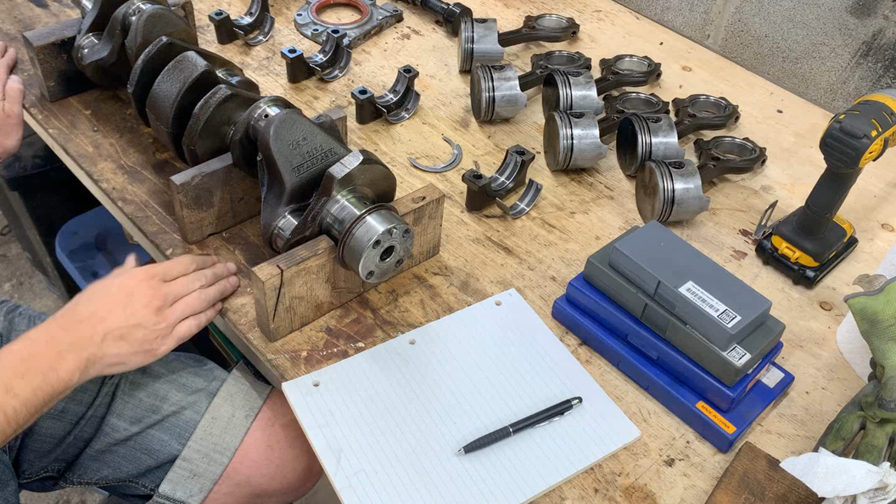Alright, so it's another day and I've been waiting all day for this moment because I'm really curious to find out what the measurements are of this crankshaft. According to the bearings, it's 20 over, so it's been ground already once or twice, I don't know. But I want to find out if it's still good for 20 over bearings. So let's find that out.

I haven't looked at the manual. I didn't want to know what the spec is, so I can have a little bit more accurate measurements, you know what I mean? I'm gonna measure in multiple directions and multiple positions, left to right in the bearing area, to make sure that they are not oval or tapered.

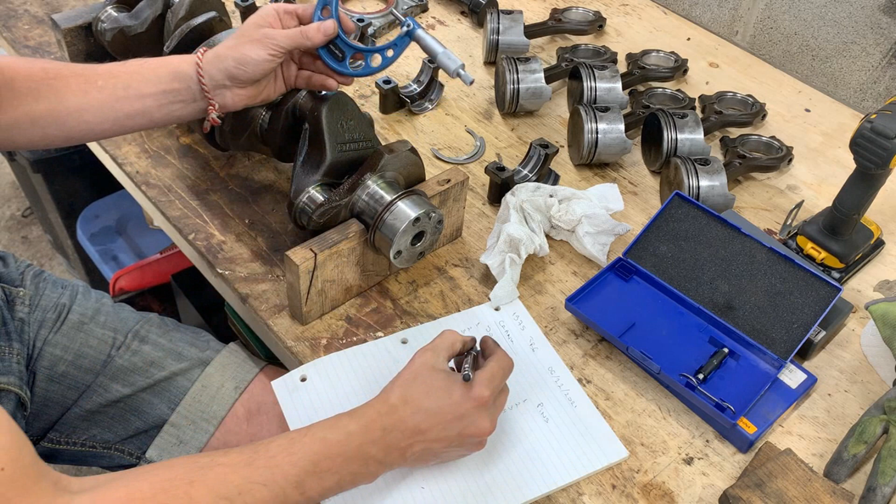Pretty consistent. So that's a good sign. Everything is within 6/10,000 on the journals.

Let's check the pins now. On number 6 we have 1.8, and then we have 56.3.

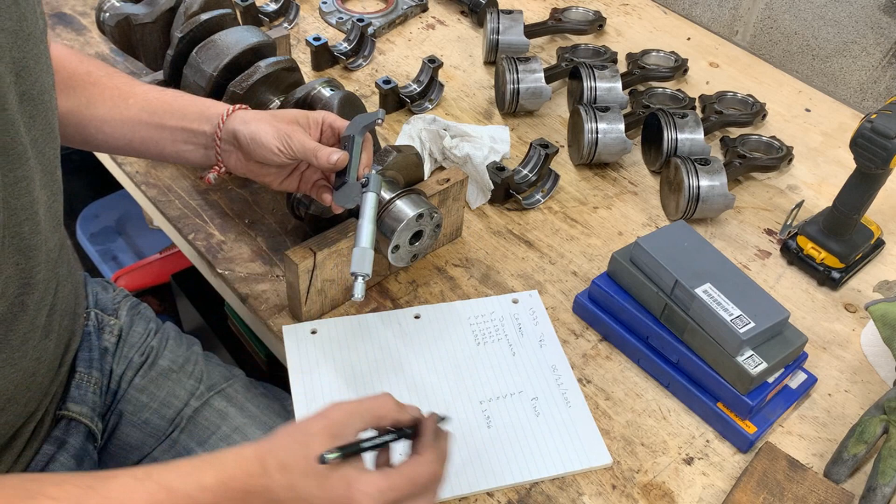So the journals are within 6/10,000, but here on the pins I went and remeasured. I was hoping that I measured this one wrong, but it's 63, and this one is 53. And we even have 51. We have 12/10,000 of a difference between the smallest one and the biggest one. That's our range here, and here our range is

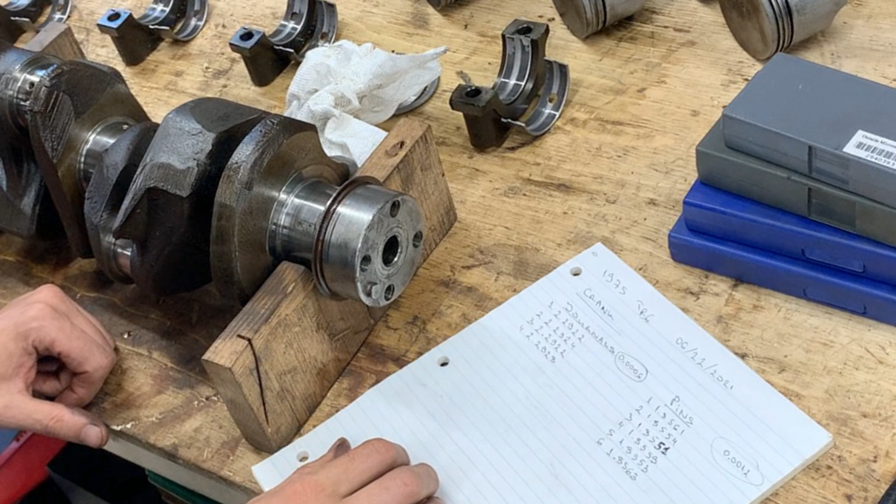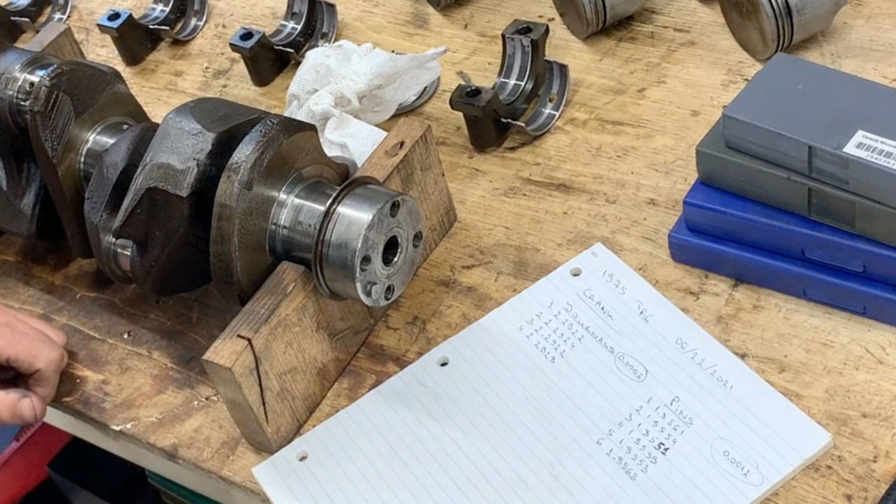6/10,000. So anyways, we're gonna check in the manual and see what the spec is for the journals and the pins, and we'll see how close we are. Because if we're somewhere in the middle here, we're gonna have some that are 6 less and some are 6 over, so we'll be fine. But if they need to be 51 all of them, for example, this one is gonna be too big for us.

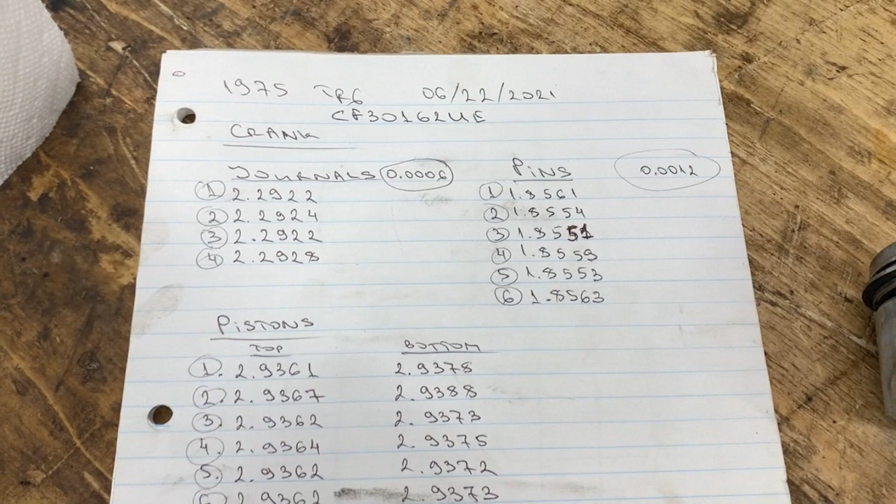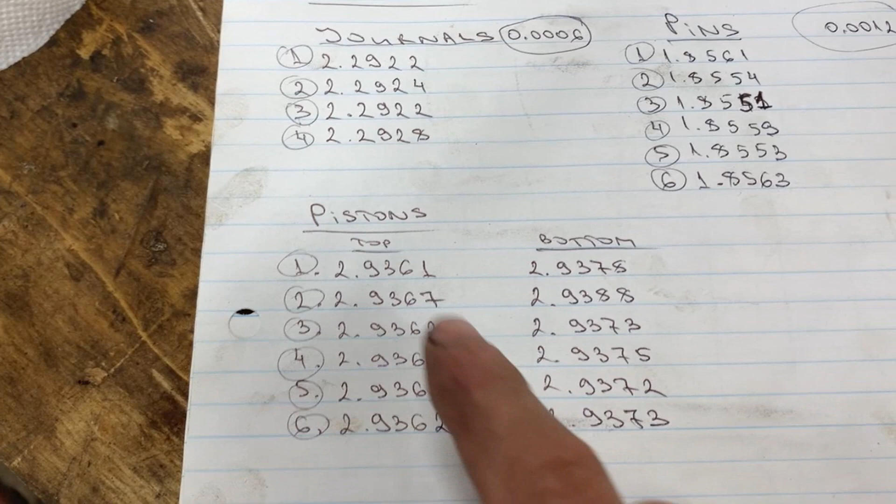Alright, so these are all the numbers, the journals, the pins on the crankshaft, and the pistons. Now for the pistons, I measured top and bottom. The important number is the top one. I just wanted to measure the bottom as well and see how even the pistons are worn, but we're just fine. So 61 to 78, 67 to 88. Everywhere we are almost 1.5 to 2 thou bigger at the bottom than at the top.

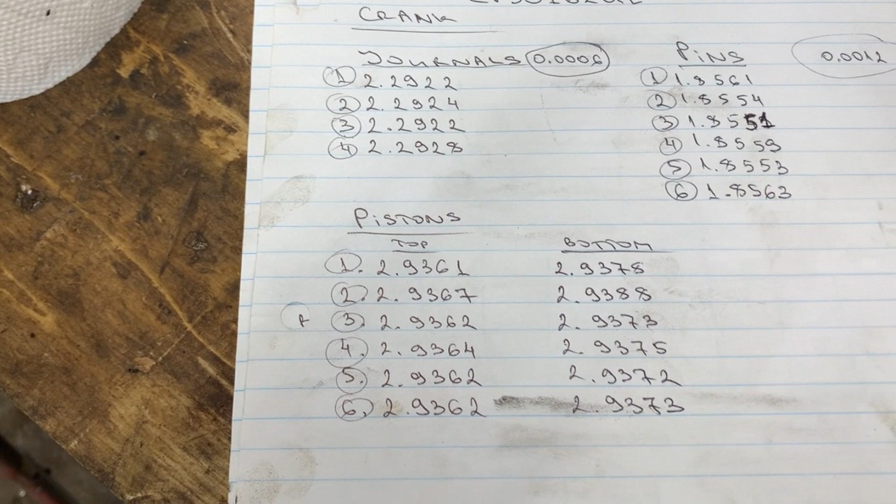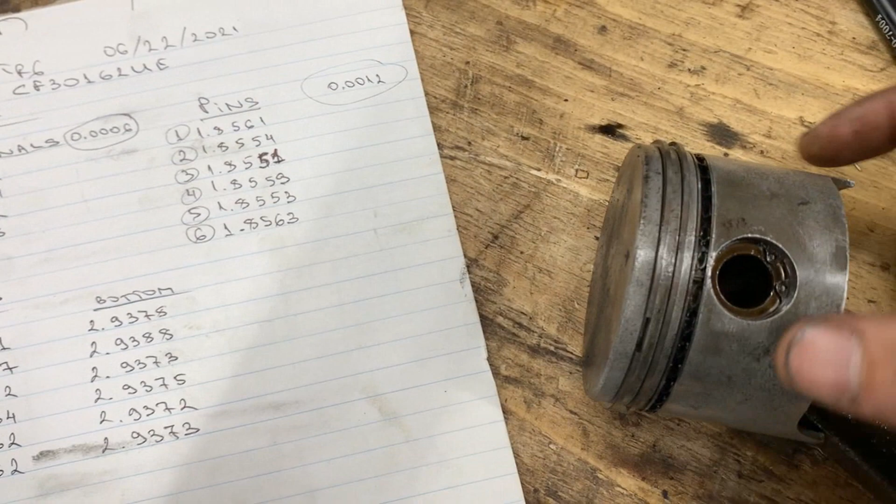That's normal. Pistons are tapered and oval, so when we measure, we always measure in this orientation across the pin, not parallel to the pin, of course. In this direction they are smaller, they're oval. If you look at it closely, they're oval, especially if you look that way. So anyways, I need to know this so we can compare to our cylinders and see what our clearance is between pistons and cylinder bore.

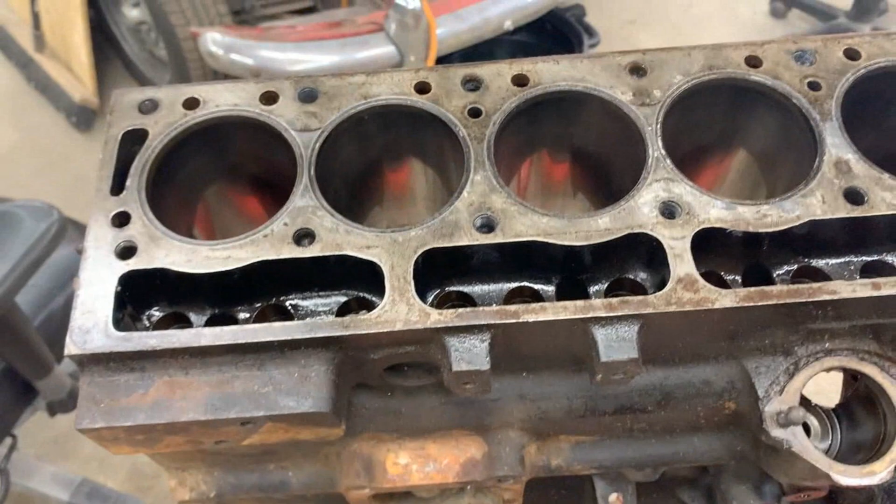And now I have the block here and we're gonna start measuring the cylinders. I purposely didn't take the spec yet, I don't want to know what the spec is. Unfortunately, I've recently measured another block, and for those of you who follow my channel, you know I'm rebuilding another engine at the same time as the 74 TR6 at work. And since I've done it just 2 days ago, I still remember the exact spec for here, and that's 2.94.

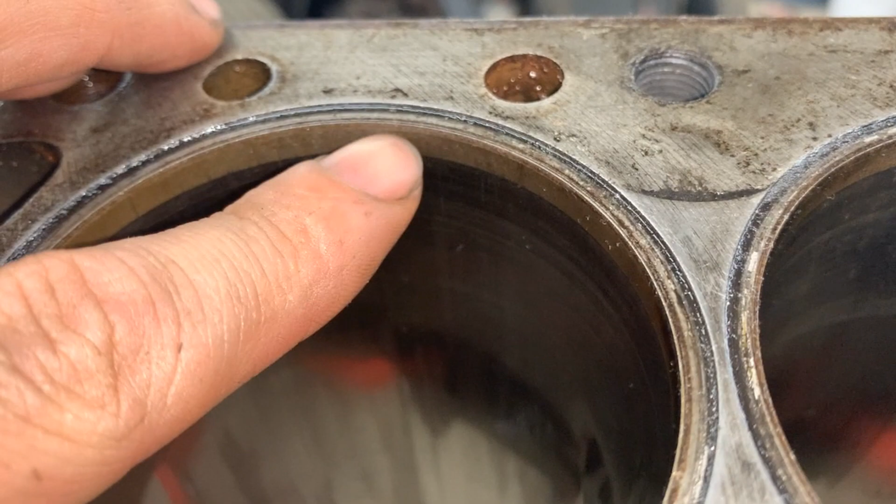Let's see how much difference we have. But before that, let's look at the cylinders closely now that we don't have pistons in them. Okay, so here is our whatever -- like I said, this is not a ridge. First thing when you open a cylinder block is to look at this and see if there's a ridge here where the rings stop. Normally when the rings wear the cylinder out, they create a ridge here. That tells you right away that this cylinder is already overworn. But here we don't have a ridge, it's just discoloration.

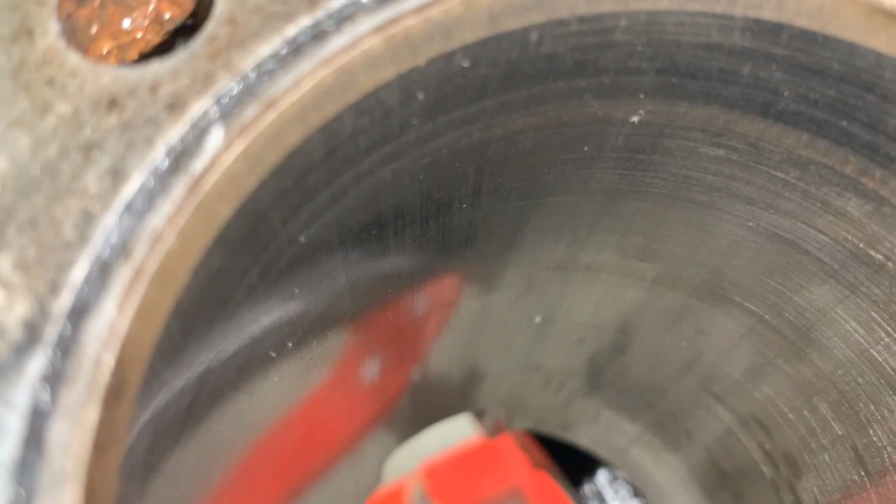So I don't see any heavy scratches or anything. Unfortunately, there's no cross hatching. If there was cross hatch still, I would say this has been done very recently. Anyways, we'll see what the size is, and if they're close to the spec, we're gonna just hone them and buy standard size rings and assemble them as they are. I really hope that this is the case.

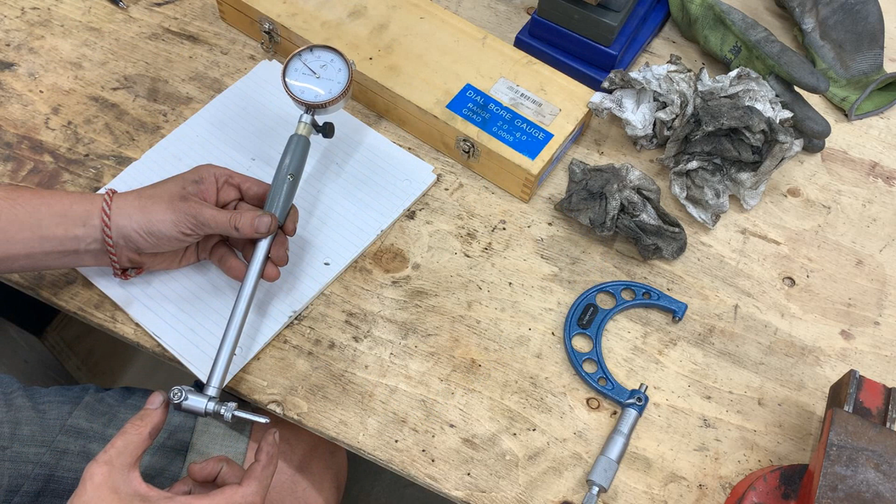And of course, this known measurement is going to be whatever we have as a spec for the cylinder, which is 2.9400 inches. And then anything bigger than that is going to show something like that. So with this, we're not measuring the whole distance, we're measuring the difference between our set number and what in actuality the cylinder bore is. Let me show you how we're going to set it to 2.9400. We're going to set our micrometer to this measurement, so that's 2.9.

So that's 2.9, 25, 30, 35, 40. So that's exactly 2.9400, this measurement from here to here.

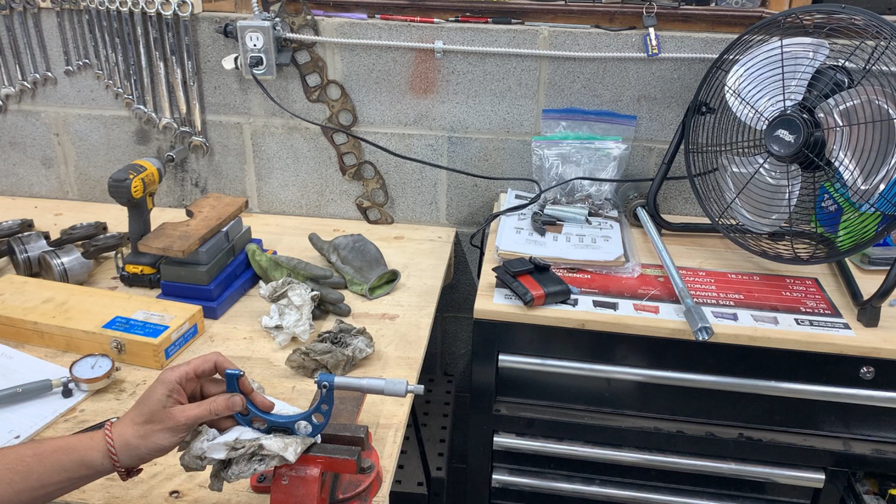So now we have to set our dial gauge to show 0 when it's here. And we're almost there, by the way. I'm going to put the micrometer on the vise very gently, because it's a precision measuring tool, so we don't want to screw it up, right? So we have to put it right in between those two.

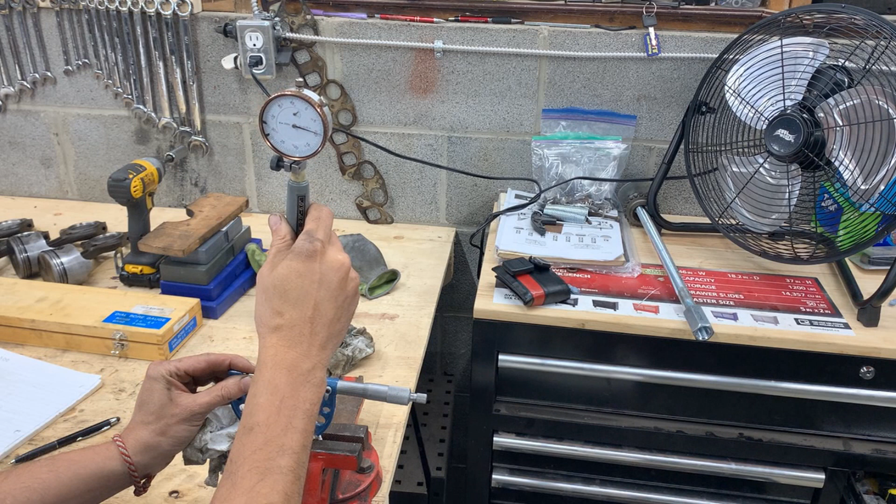So now we have to find the narrowest distance here, because everything wider than the narrowest spot is diagonal. We don't want diagonals, we want perpendicular. So that's where our 0 is.

Thing is, I'm not going to be able to do it like that. So there you go, it goes to 0. As I'm shaking it up and down, it goes to 0, and then it goes up again. So 0 is our shortest distance. So that's it. Now we know that when it shows 0, it shows exactly

2.9400. And then whatever the distance here is, that's our difference. That's how much over 2.9400 we have. So let's go to the cylinder now.

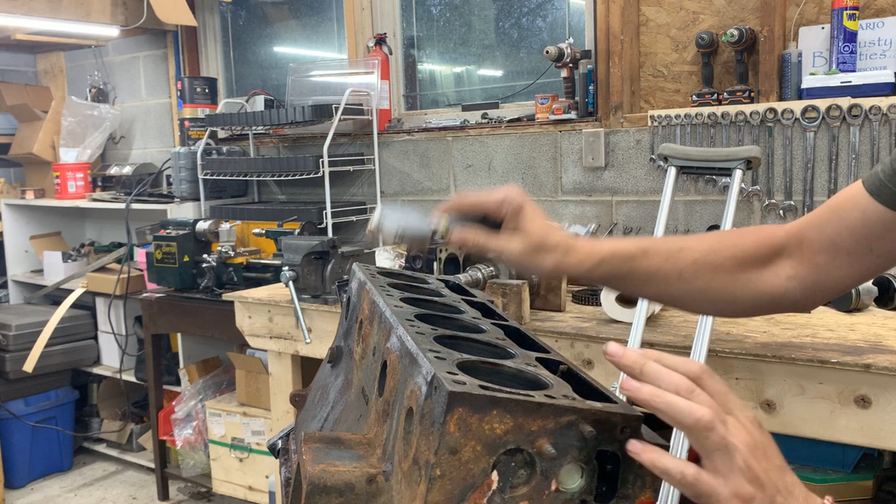Alright, so now that we have our tool set to 2.94, let's see how wide our cylinder is. So how we measure is we drop it down and we try to position it perpendicular to the cylinder, because if it is tilted like that, it's going to give us a wider measurement, or if it's tilted like that, again, it's going to give us a wider measurement. We're looking for the shortest measurement, which is going to be exactly perpendicular.

So when we drop it down, you see, wide, narrow, and then going wide again. So we're looking for the shortest one, the narrowest one, which for us here is 21 10,000ths, I would say.

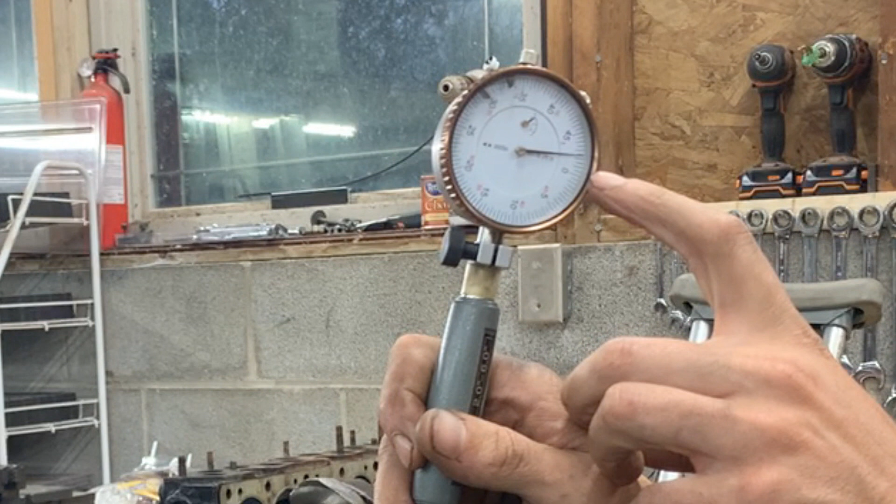So the small increments here are 5 10,000ths of an inch or half a thou, and every other one is 1 thou. So we have 2 thou and a little bit more. So 21 10,000ths of an inch is this cylinder.

This tells us that the difference between our set measurement and the true measurement of the cylinder is 21 10,000ths. So these 21 10,000ths we need to add to our set measurement, which is 2.9400. So now we know that this cylinder is exactly 2.9421 bore.

So this is the true bore of this cylinder. But is that enough for us? No, it's not enough, because this cylinder might not be round anymore, it might be oval. So here it might be exact measurement, but here it might be bigger or smaller. We don't know that. So for this reason, we're going to take 3 different positions.

We're going to measure, I call them first, second, and third position. My first position is always across the block this way. That's my first position. Then I go 120 degrees clockwise, and that's my second position. I measure in this direction too. And then I measure 120 degrees counterclockwise from my first position. That's my third position, and we measure also how wide the cylinder is here.

And then when we compare these 3 measurements, we can say if this cylinder is still round or it is out of round, or if it's oval already.

And that's still not enough, because the cylinder might have been worn also in a taper shape like this, because sometimes the cylinders get worn more at the top than at the bottom. So we're going to take one measurement at almost at the top of the cylinder, one somewhere in the middle, and one somewhere at the bottom of the cylinder.

So top, center, and bottom. And again, for each depth, we're going to measure the 3 different positions. And then we're going to compare, for each position, the measurement at top, center, and bottom. And that's going to tell us if in this orientation, this cylinder is tapered.

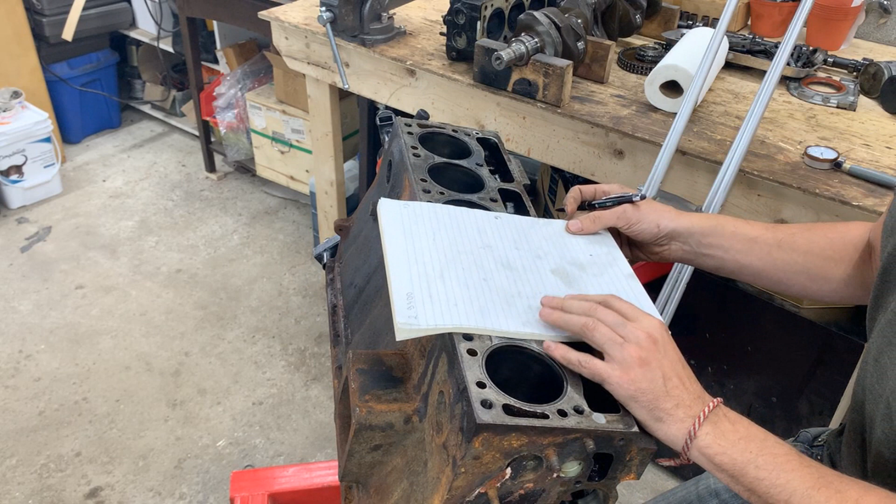For this reason, I came up with a chart like this. I hope you can see it. Maybe I should take a marker. So we said that our set measurement for the dial gauge is 2.9400. This is going to be our top, our center, and our bottom. This is going to be our first position, second, and third position. So let's take these measurements, and then we're going to see how we're going to analyze them.

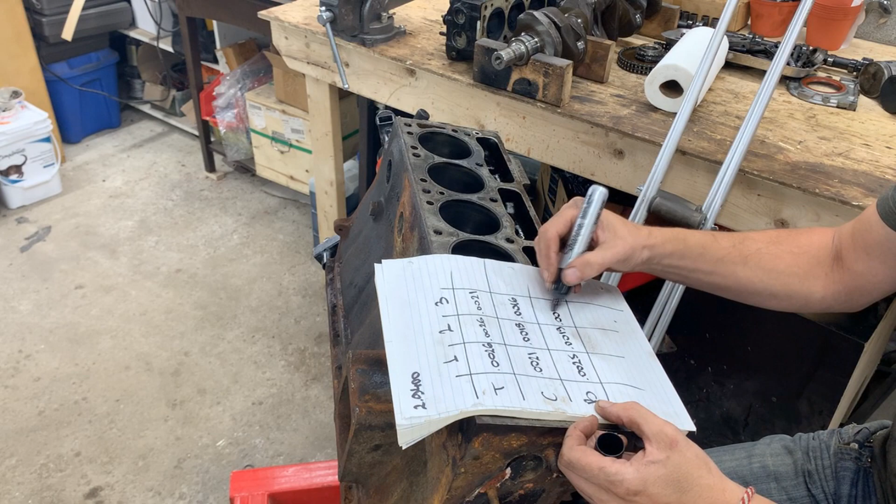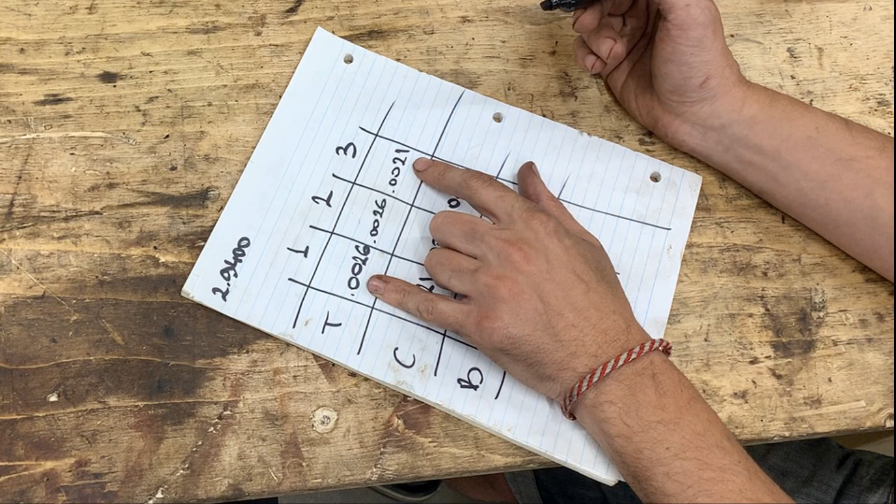Okay, so now that we have all these 9 measurements, let's analyze and see what information that gives you. At the top level of the cylinder, in positions 1, 2, and 3, we have these 3 measurements. The smallest one is 21 10,000ths of an inch, the biggest one is 26. The difference between them is 5 10,000ths of an inch. At the top level, the cylinder bore is out of round by 5 10,000ths of an inch.

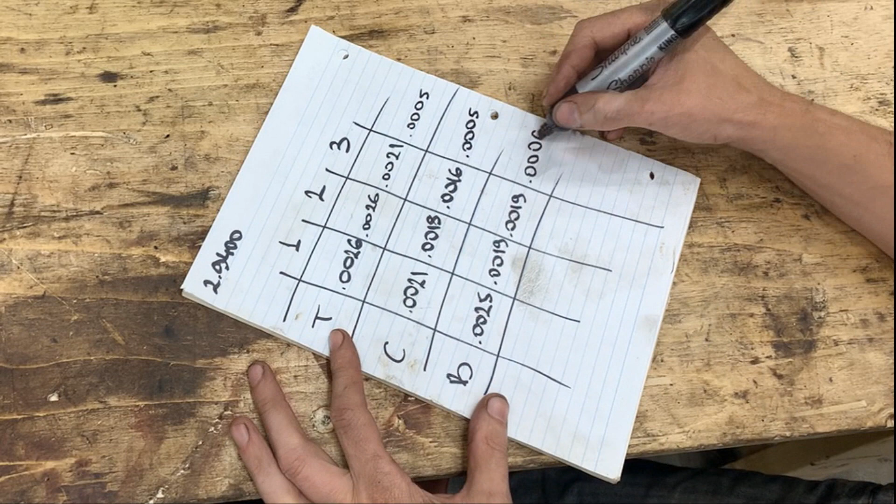Which is totally acceptable, by the way. Here, the smallest one is 16, the biggest one is 21, so at the center we have out of round 5 10,000ths again. And here, 19 to 25 at the bottom, we have 6 10,000ths of an inch out of round. So our biggest out of round is what matters, so .0006 is our overall out of round.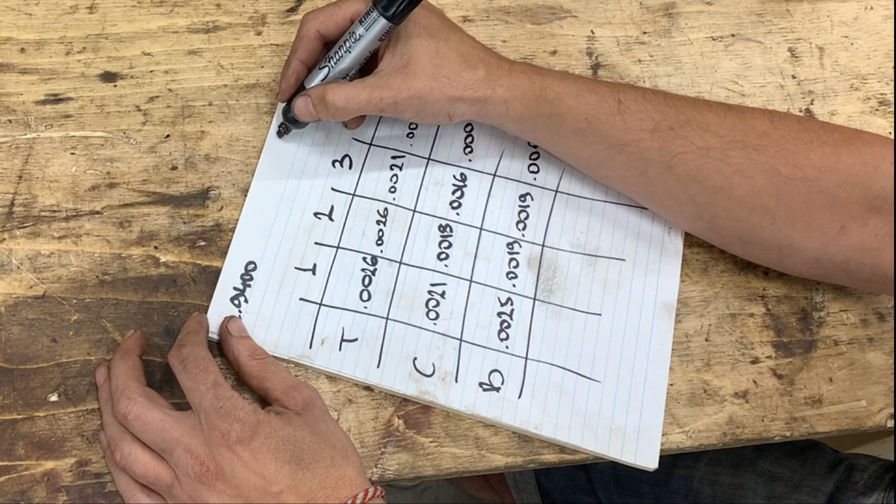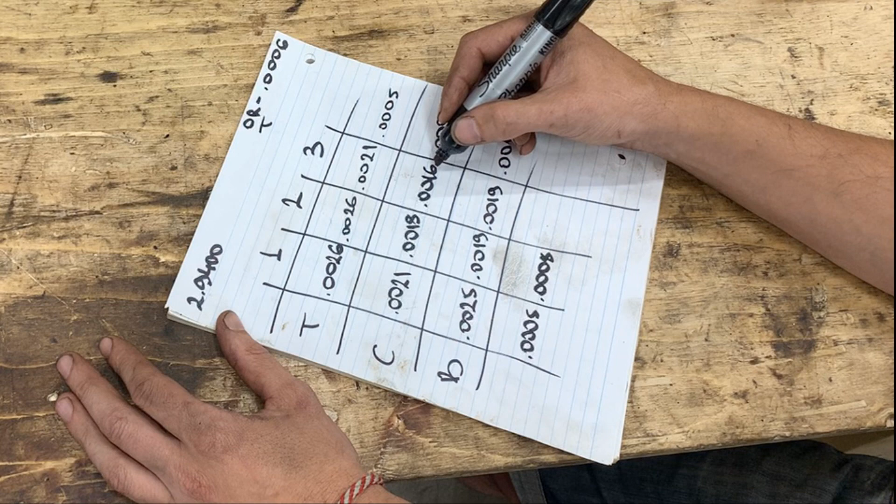Now let's check for taper. We're going to check top, center and bottom of the same position, position number 1. Here we have 21 to 26, that's 5 10,000ths of an inch of taper. Here we have from 18 to 26, that's 8 10,000ths of an inch, and here from 16 to 21, that's 5 10,000ths of an inch. Our biggest taper is 8 10,000ths of an inch, which is totally acceptable too.

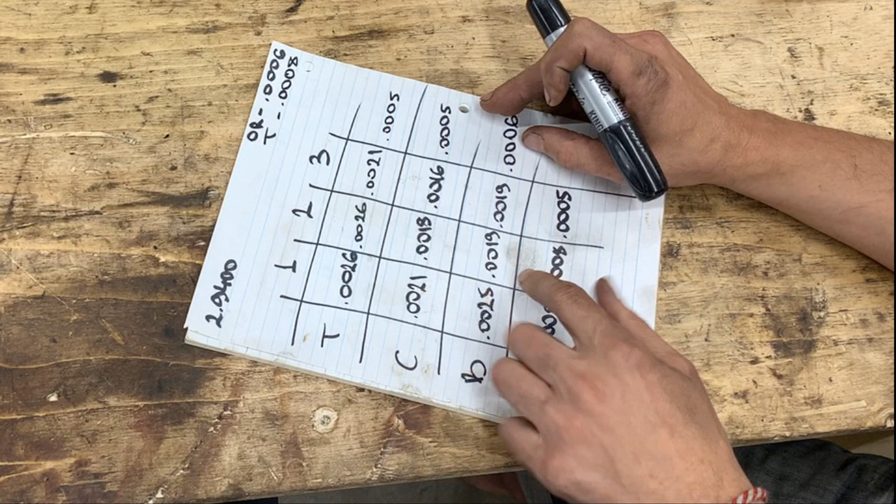And now for our overall measurement, we have to add the biggest number out of these to our set measurement of the gauge. The biggest one is 26 10,000ths of an inch, so our measurement max is 2.9426. So this is the information that we need for this cylinder.

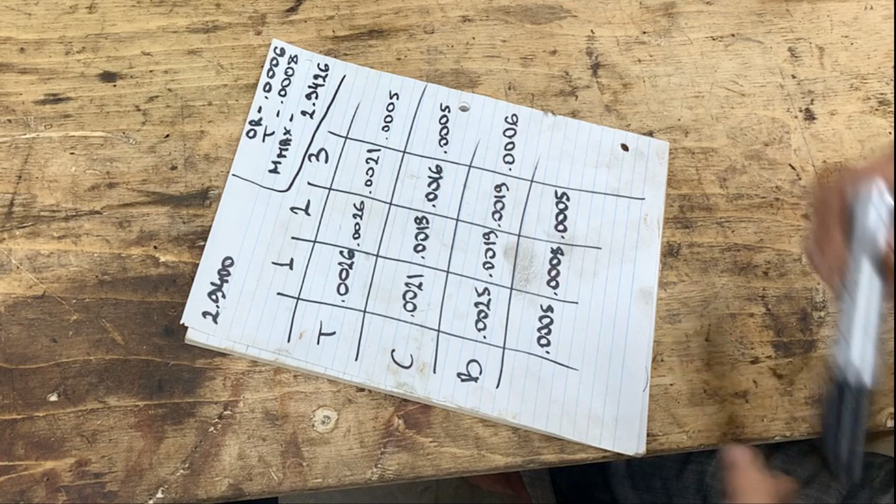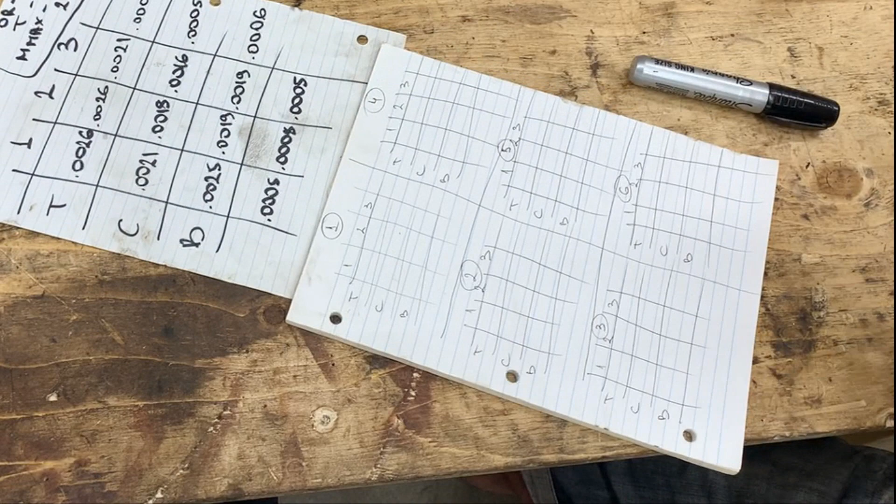So we're going to compare it to the spec and we will see if that's acceptable. But we're going to do that for all the cylinders, and I already drew a chart here that is going to help me put everything together. I'm just going to transfer all this here for the first cylinder, and we're going to measure the other ones too.

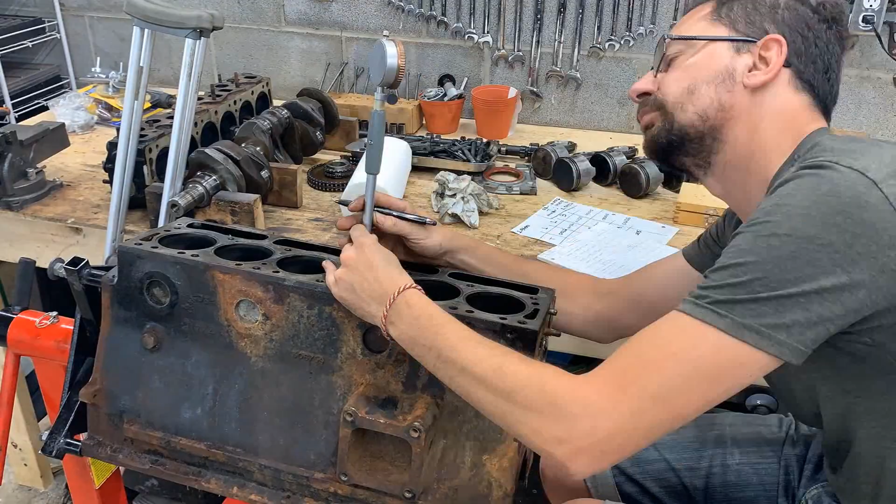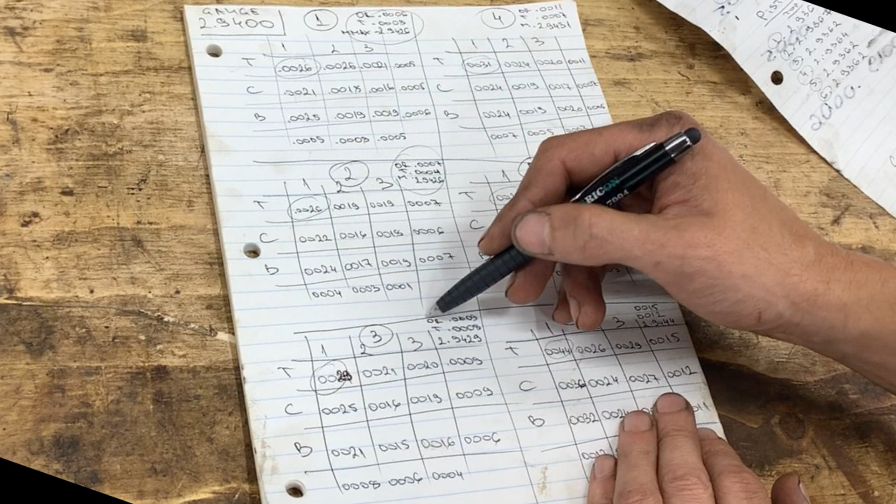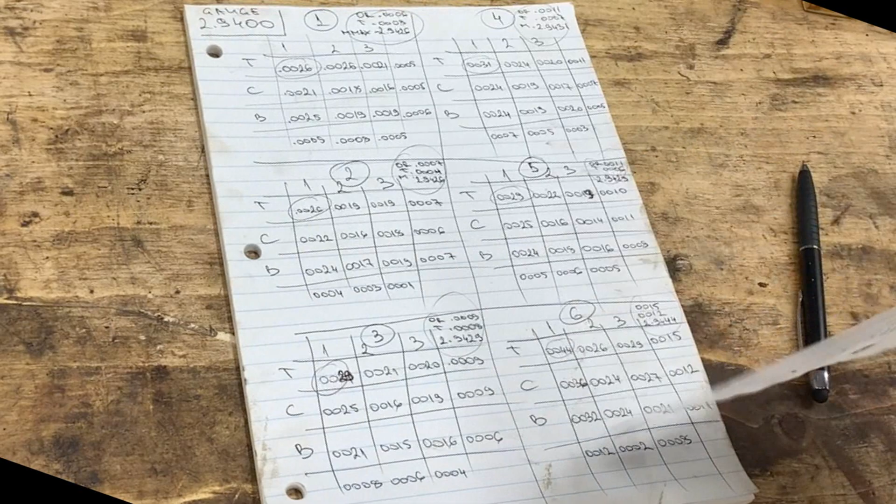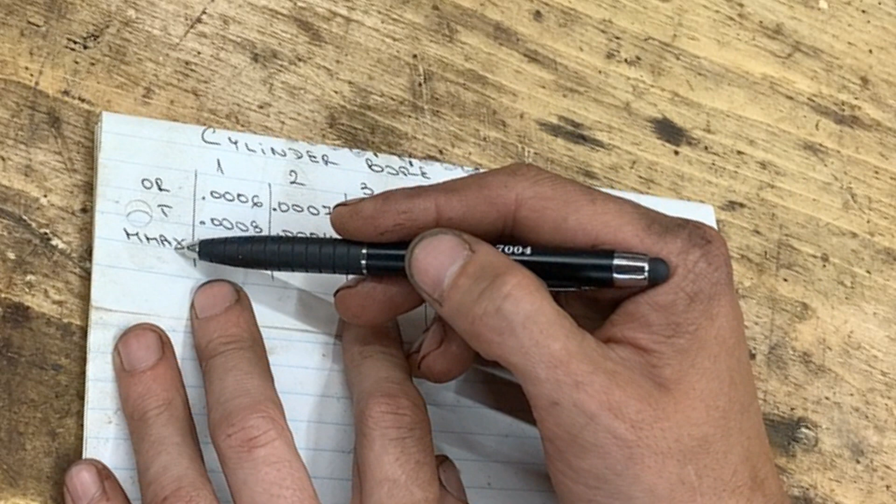All right, so I measured everything. I calculated all the out of rounds, all the tapers. I put them in each corner here of each cylinder, and then I transferred them here on this paper. Unfortunately I used this paper for this, so now it's pretty unreadable, but yeah, that's more clear. So I have cylinders 1 to 6, and I have out of round, taper, and maximum measurement that I found on each cylinder.

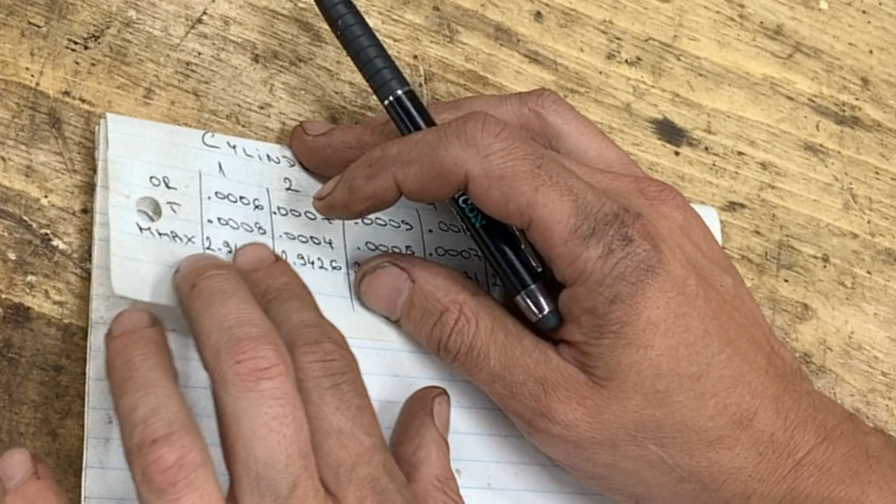If you see here, for cylinder 1, we have 6 out of round. I'm not really sure what the tolerances here are, but I am accepting everything up to 10, maybe 15 even sometimes, if it's only here and there. But here we are fine - we have 6 out of round and 8 taper. The total measurement of this cylinder is 2.9426, which means it is 26 bigger than the spec.

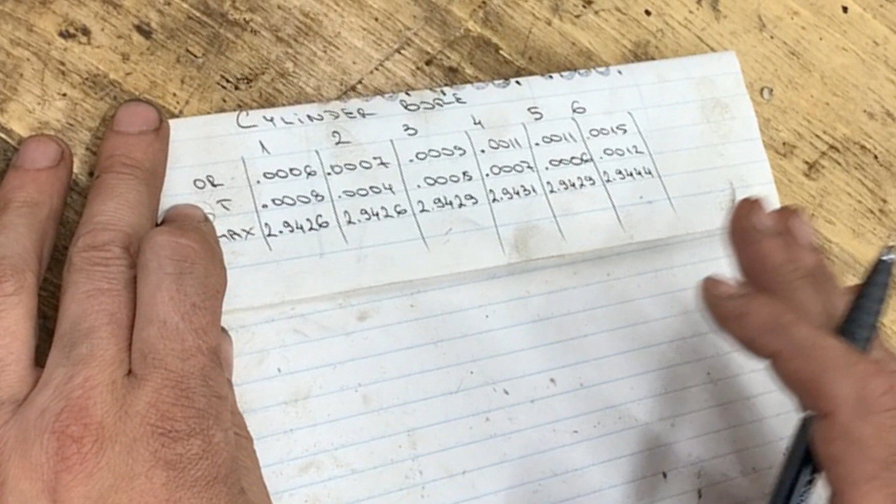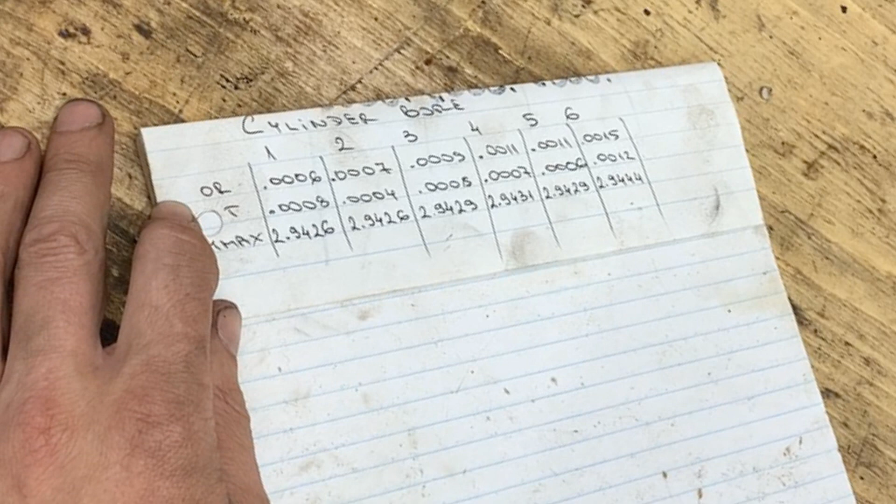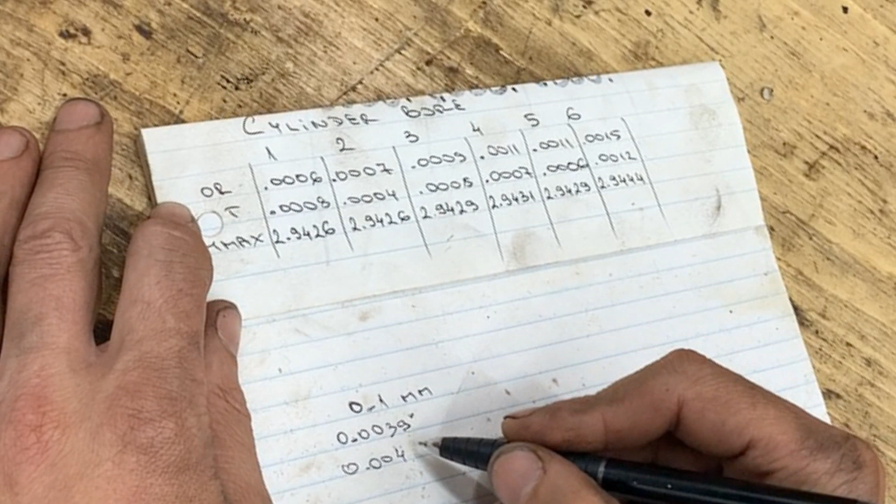Now, in all the manuals, there's absolutely no wear limit. Nowhere do they mention how much is the wear limit before you have to go and rebore the cylinders. Unofficially, everybody says that the wear limit is 0.1 millimeters, which equals 0.0039 inches - 39 10,000ths of an inch, or almost 4 thou, is our wear limit. So here we're only 26 10,000ths of an inch bigger, or 2.6 thou. So we are still within the wear limit.

We are at the top end, so I wouldn't recommend staying with the engine as is. I would recommend reboring it, but that's not the only reason, and we're going to get to that later.

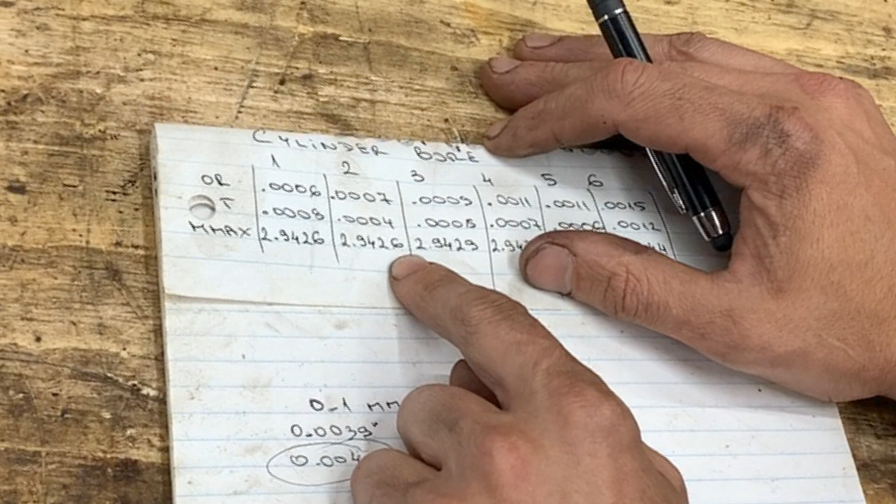So cylinder 2, we have 7 out of round, 4 taper, 26 bigger than the spec. So again, we are still within the wear limit. On cylinder 3, we are 9 tenths out of round, 8 tenths of taper, 29 10,000ths bigger than the spec, still within tolerance. Here though, now we become bigger and bigger.

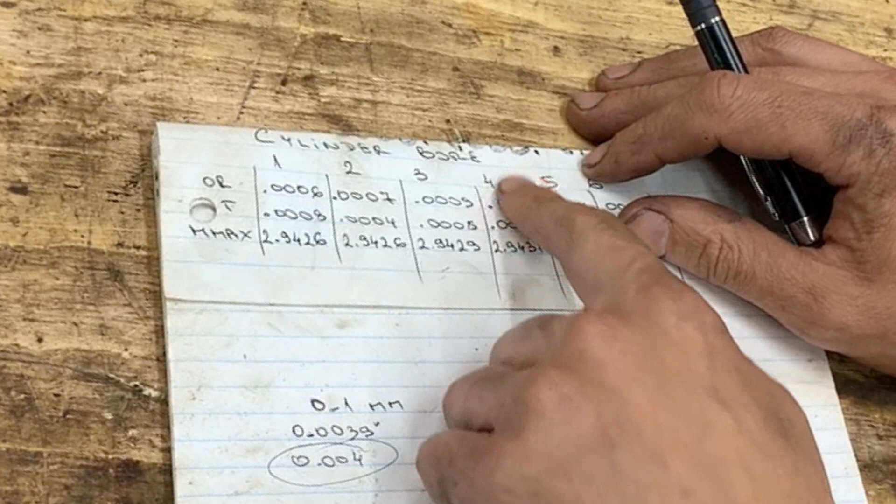Cylinder number 4 is 11 out of round, 7 taper, 31 bigger than the spec, so it's very close to the 39 limit. Here we're again 11, 6 and 29 - again pretty close.

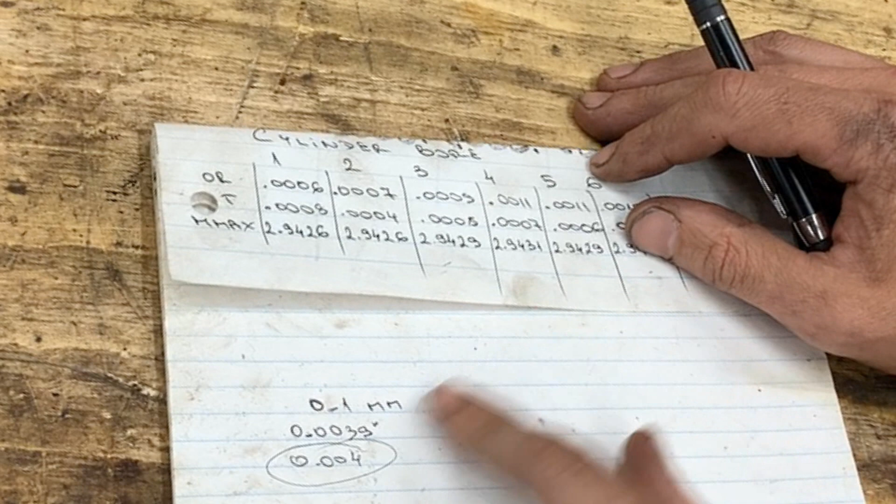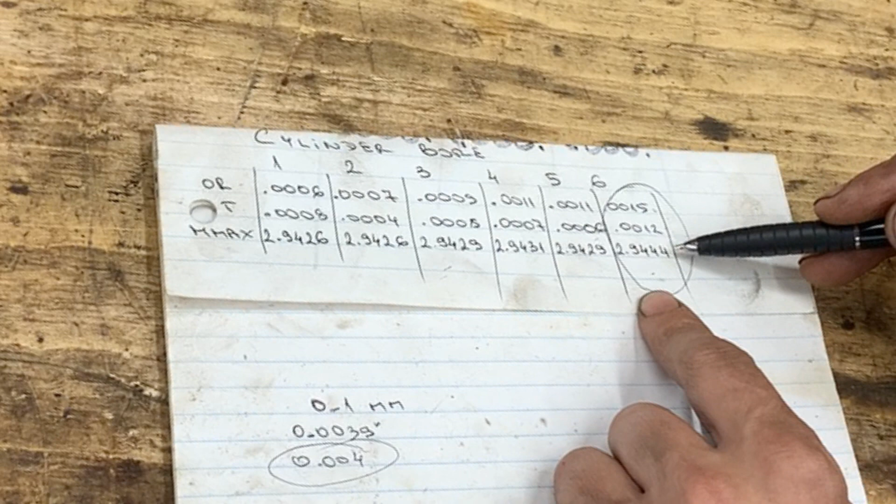And cylinder number 6 is what confirmed for sure that I have to rebore this block, because look at this - 15 out of round, 12 taper, and 44 10,000ths of an inch bigger than the spec. So it is already bigger than the wear limit, and it's so much bigger than all the other cylinders. I have to look at the compression - I don't remember what cylinder number 6 was as a compression - but it is so much bigger than cylinder number 1, for example. So definitely this whole engine needs to be rebored to the next level, which is 20 thou.

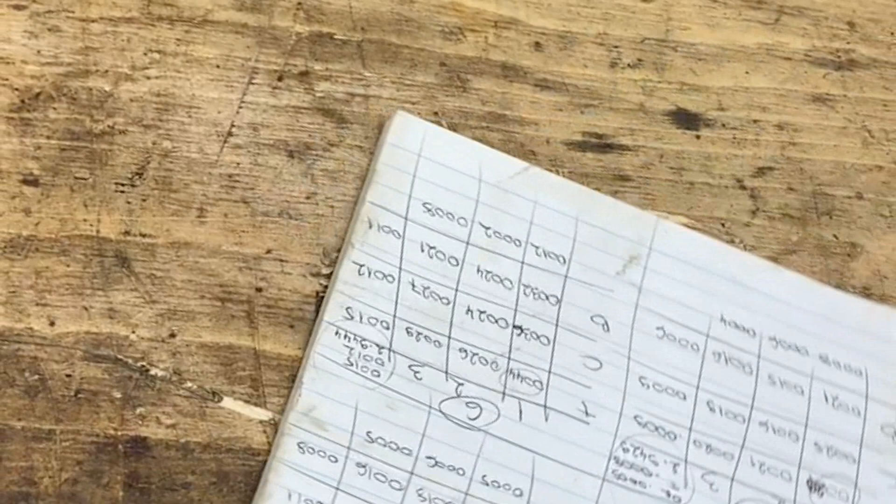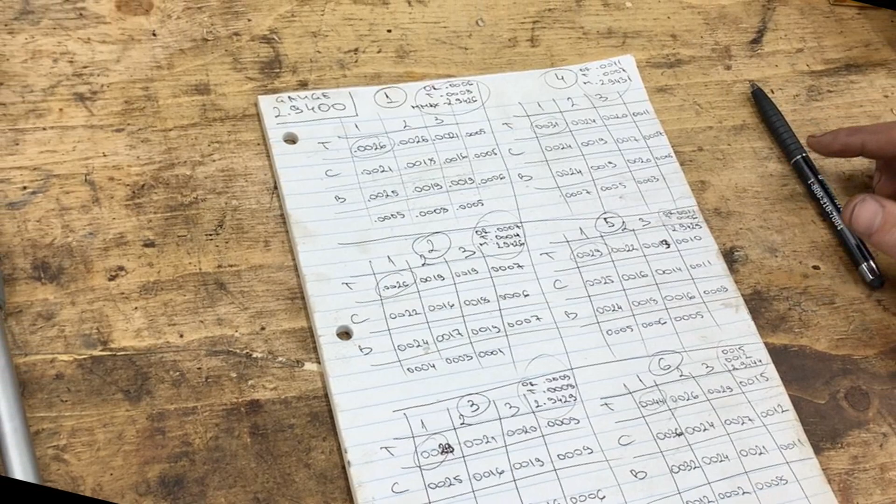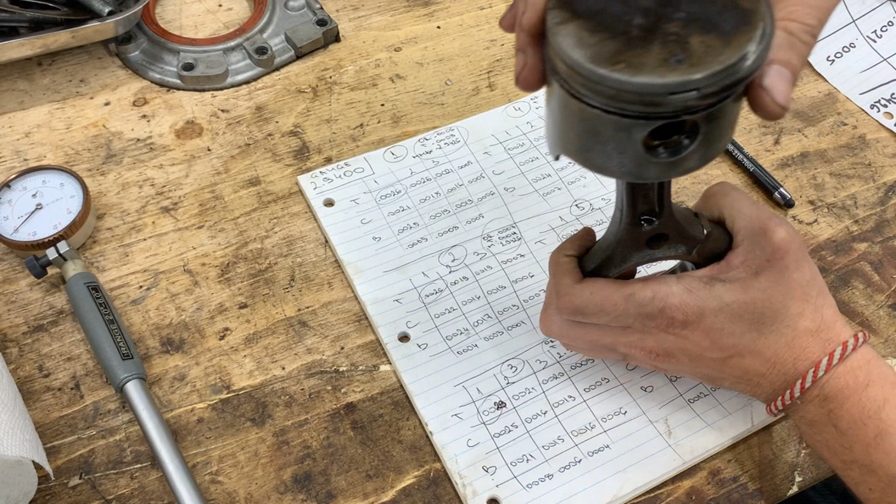Yep, that's where we're going. And if you look here, just for your information, the biggest number for each cylinder was always in position 1 at the top. That's because cylinders always wear as a taper, so the biggest measurement is going to be somewhere at the top, and also because the piston is always pushing in this orientation, wearing the cylinder on this side and on this side.

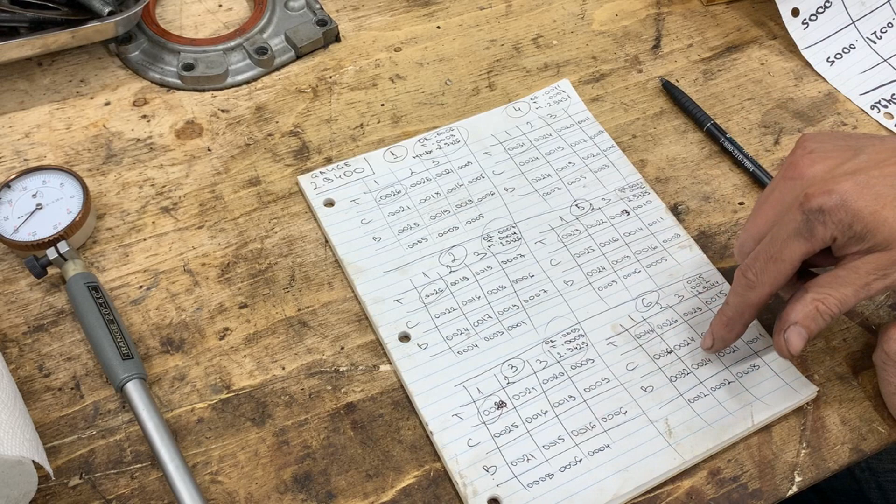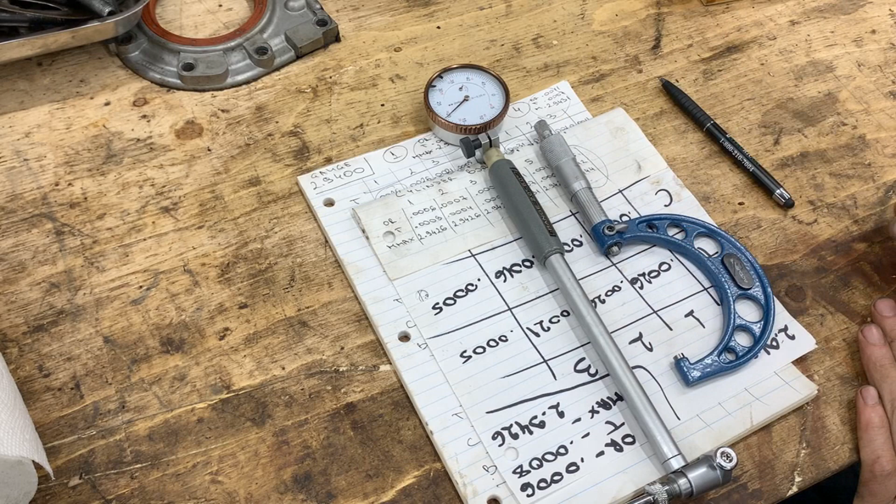Believe me guys, I went back and measured this one more time to make sure I'm not wrong, and then I even double checked my tool with the micrometer to make sure I didn't drop it or something, but unfortunately it is what it is.

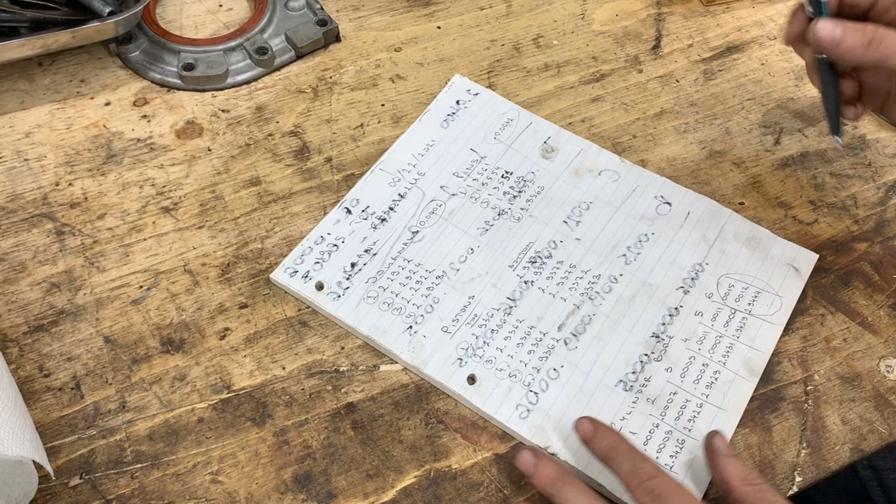So I'm going to put all this information in my computer just in case, but the decision here is that the cylinders need to be rebored to plus 0.020, to 2.9600. That of course means we need new pistons, so we don't care about this measurement.

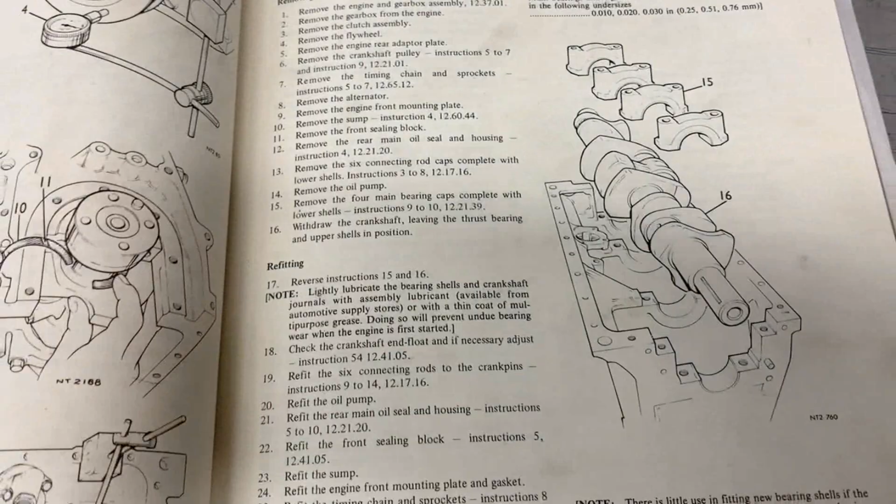Now let's look at the journals and the pins. I have the Bentley manual here, and I was having a really hard time finding the crankshaft measurements, but I found them here. They actually give the data in one of the articles about how to remove and replace the crankshaft, not in the general specification data. Anyways, this is what it says here.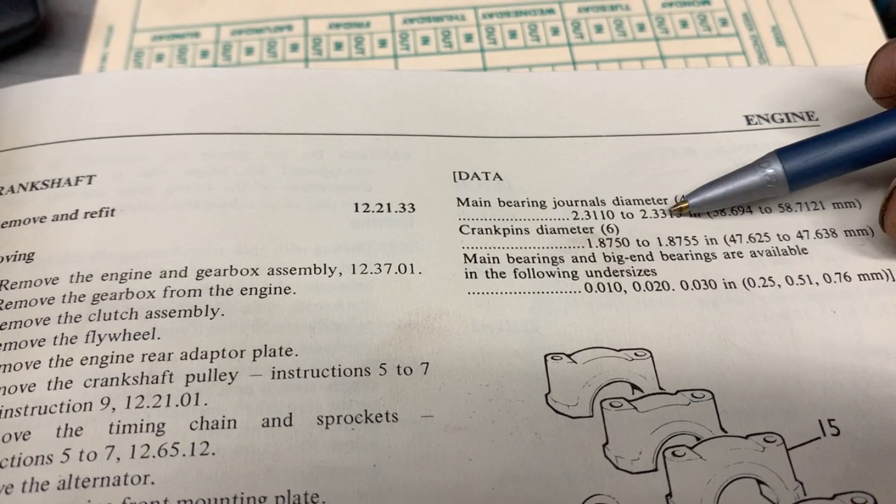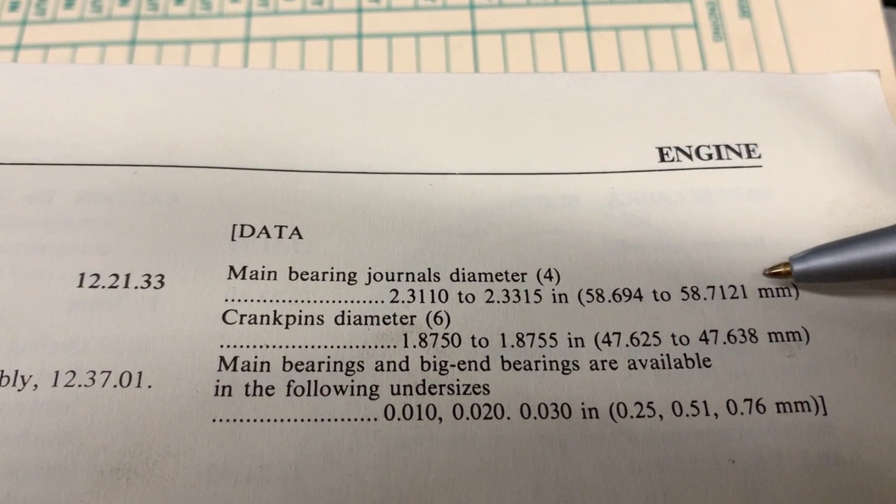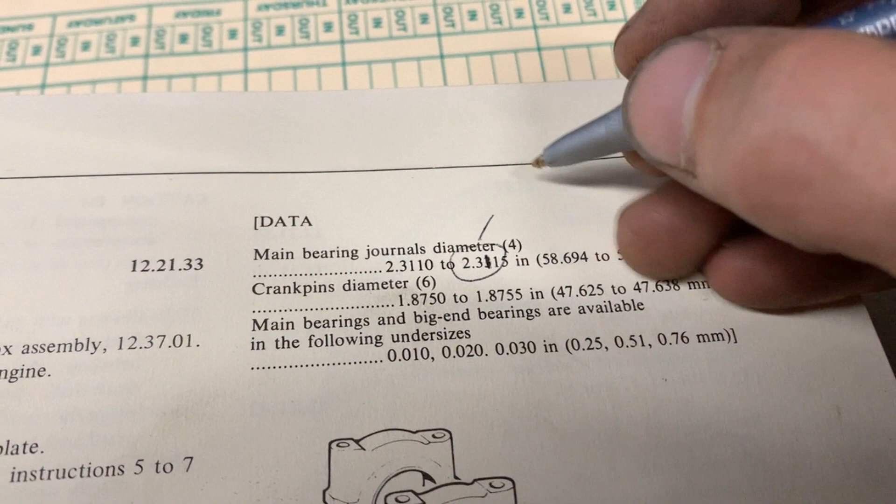The journals need to be between 2.3110 and 2.3315. Definitely that's a typo because it can't be such a big tolerance, this is like 20 thou difference. So I went to the metric here and converted it back to imperial, and it turns out this is not a 3, this is a 1. So I'm going to correct it here: 2.3115, just for future reference.

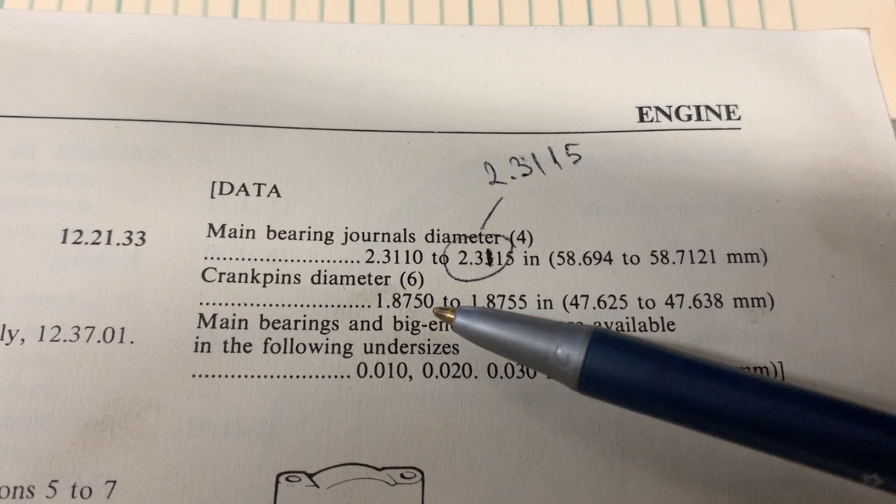And the pin's diameter is 1.8750 to 1.8755. So this is our standard.

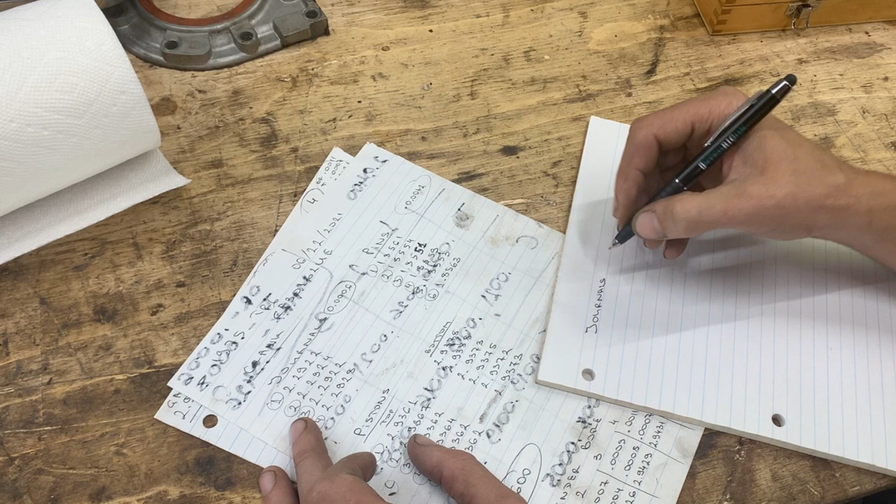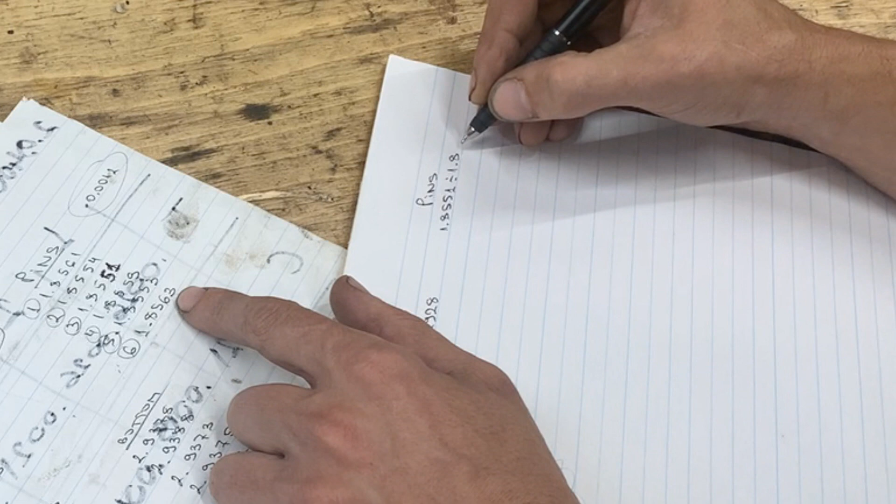Because this page became a mess, I'm just going to say that our journals are between 2.2922 and 2.2928, and our pins are between 1.8551 and 1.8563. So based on the manual, our spec here is 2.3110 to 2.3115.

And our spec here for the pins was 1.8750 to 1.8755. So according to the bearings that we had on the crankshaft, it's been ground by 0.0200. That makes it come to 2.2910 to 2.2915. So that should be our range, 2910 to 2915.

Well, we are a little bit bigger. So the smallest journals are bigger by 0.0007, and the biggest journals are bigger by 0.0013. But it's good that they're bigger, not smaller. So I believe we are good on the journals.

And the same here, if we subtract 0.0200 from the spec, we end up with this number: 1.8550 to 1.8555. So our smallest pins are within the spec, they're smaller than the higher range, so we're fine.

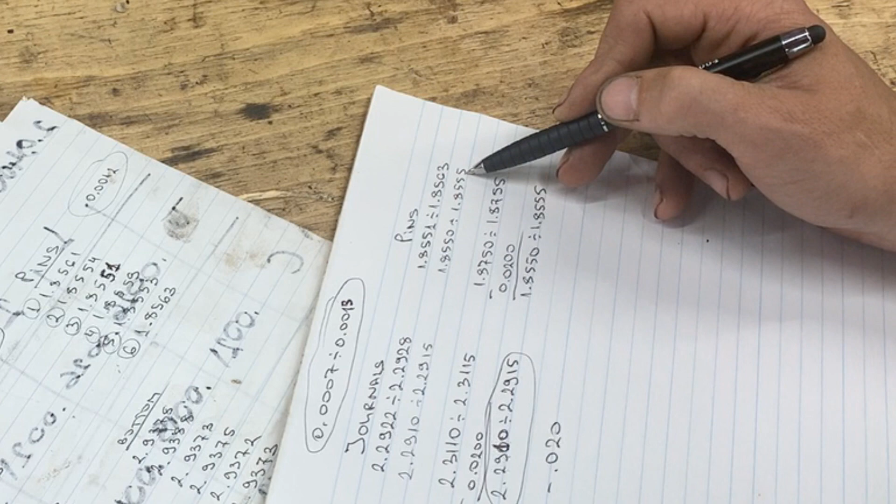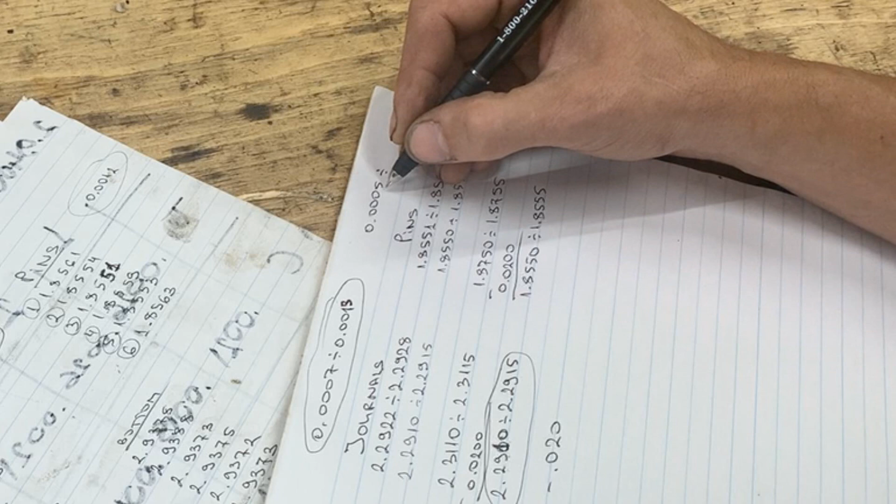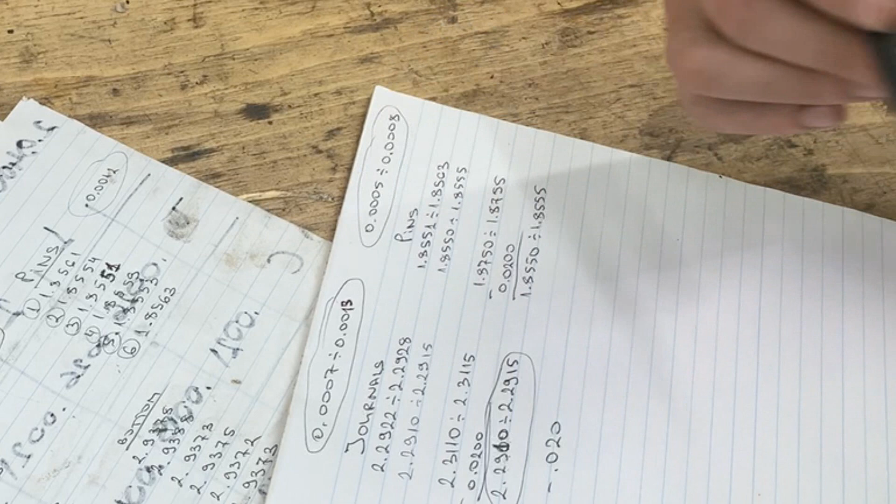So some of the pins, let me see which ones. We have only two: one that is bigger by 5 tenths, and this one is bigger by 8 tenths. Again, this is less than a thou, I will let it go. So our crank is perfect.

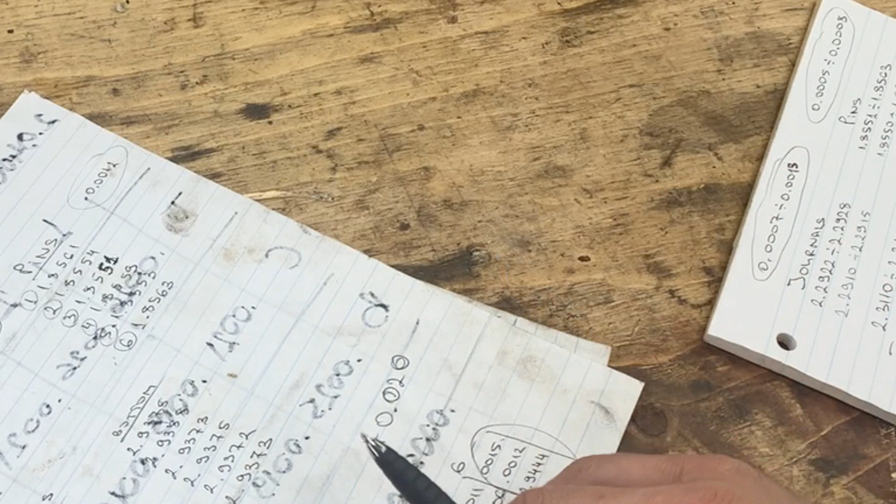So we're not going to do anything with the crank, it's going to go as is, we're just going to buy new bearings. The cylinders we're going to have to rebore to 2.9600, which is 20 thou over, and that's it. So we're done with our measurements.

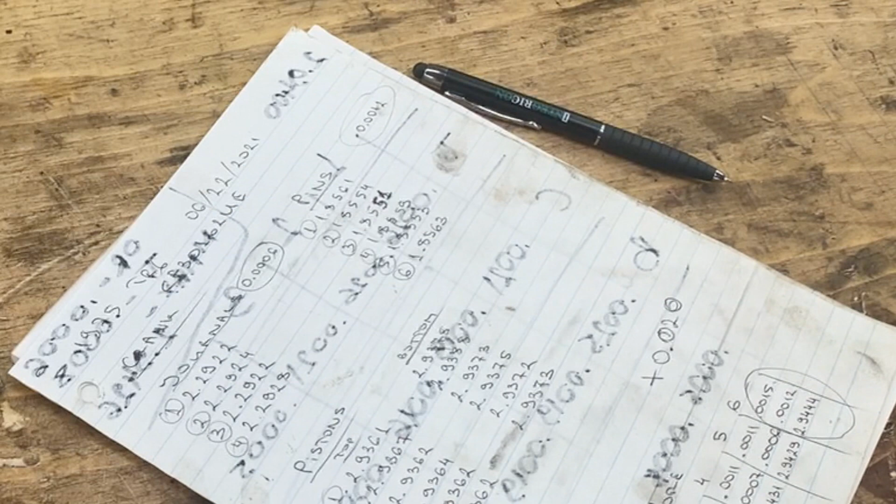I think it's enough, I'm sure Chef Tash's brain hurts again, so I'm not going to do any more numbers. Let's put an end to this video here, and in the next one we're going to start taking the head apart so we can have an idea about all the parts, and then we can order them, and as soon as they come we're going to start assembling.

And of course we're going to have to machine the block. I already called a machine shop, they can do it within a week, so that's fantastic. As soon as we get the parts and have the block back, we can start assembling and timing and all these fun things we have to do with the engine.